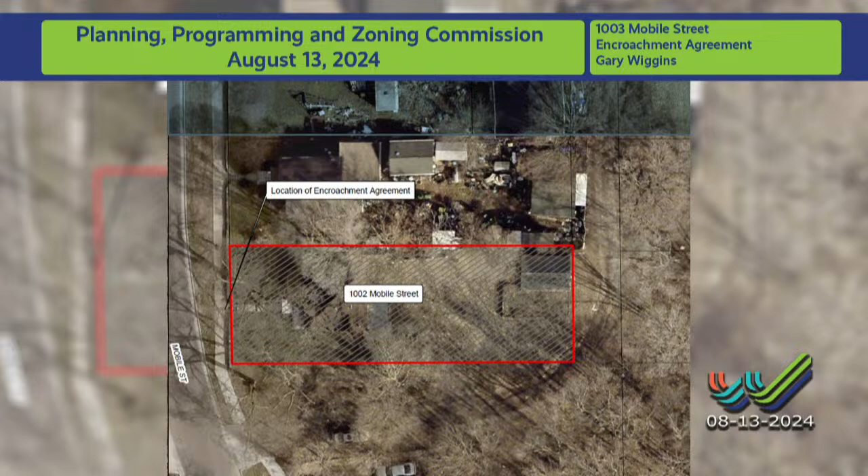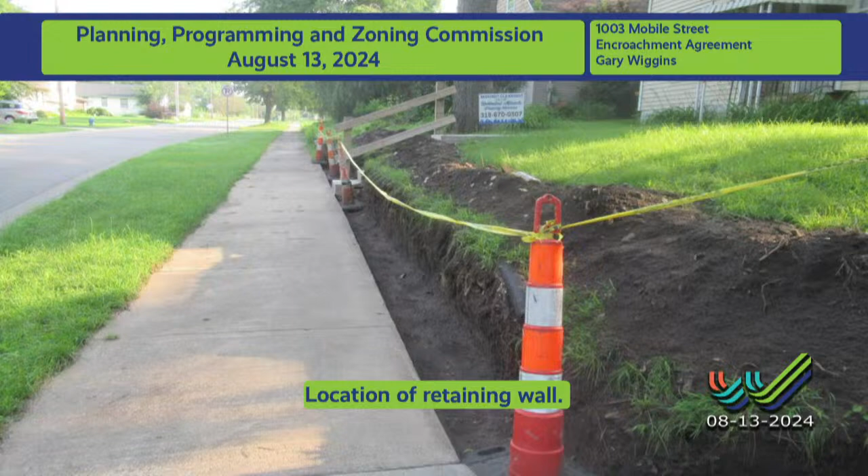Therefore, staff recommends that the request by Gary Wiggins for an encroachment agreement to allow for a retaining wall in city-owned right-of-way located in the R2 One and Two Family Residence District at 1002 Mobile Street be approved for the following reasons: the request will not appear to have a negative impact on the surrounding area or on vehicular or pedestrian traffic; the proposed structure will be replacing a previous retaining wall that there were no known issues with; and subject to the following condition, a fully signed and executed encroachment agreement.

Thank you for that. Are there any questions for staff? I have a question—who signs on the encroachment agreement? What's required on that? The property owner. Only the property owner? Yes. Okay, thank you.

Any other questions for staff? Is there anyone in the audience that would like to speak for or against the request? Anyone on Zoom that would like to speak for or against the request? At this point, I'll entertain a motion on the item.

Commissioner Shirk: I'd like to make a motion to approve the request by Gary Wiggins for an encroachment agreement to allow for a retaining wall in city-owned right-of-way located in the R2 One and Two Family Residence District, located at 1002 Mobile Street, subject to the following conditions: a fully signed and executed encroachment agreement.

Schaefer with the second. There is a motion and a second. Is there any discussion? Hearing none, all those in favor of the motion signify by saying aye.

Aye. Any opposed? Thank you. Motion carries. Next up, we have a request by Goodwill Industries for an encroachment agreement to allow for a stairway and a sitting area in the right-of-way of Maxwell Street, replacing a previous encroachment in the C2 commercial district located at 2800 Falls Avenue. This is Schneider with staff.

The applicant is requesting an encroachment agreement to install new stairs and a sitting area within the right-of-way of Maxwell Street. The request would not appear to have a negative impact on the surrounding neighborhood, nor a negative impact on vehicular or pedestrian traffic in the area. The site is zoned C2 Commercial District and has been zoned as such since the adoption of the zoning ordinance in 1969. To the north is single-family homes, zoned R2 Two Family Residence District, and to the east, west, and south are commercial businesses, zoned C2 Commercial District.

The applicant is requesting an encroachment agreement to replace a ramp and stairway with a canopy in the right-of-way along Maxwell Street with stairs and a sitting area. The ramp and stairway have been demolished. It was approximately 30 feet by 6 feet, and the new stairs and sitting area are proposed to be approximately 19 feet by 6 feet and will not be covered by a canopy.

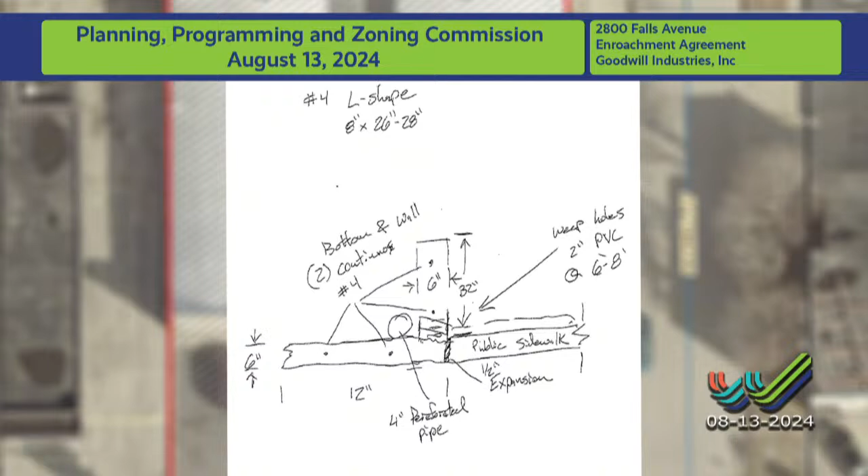An indemnity agreement was completed when the original stairs and ramp were installed in 1989. The indemnity agreement predated encroachment agreements, and the proposed encroachment agreement will supersede the indemnity agreement. The building department has no concerns about losing this entrance as an ADA access point because it is not a public entrance, and therefore it is not required to meet ADA accessibility.

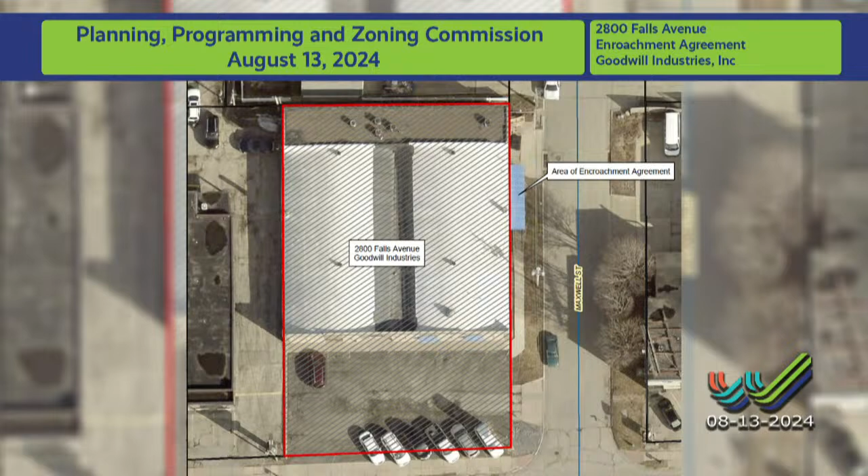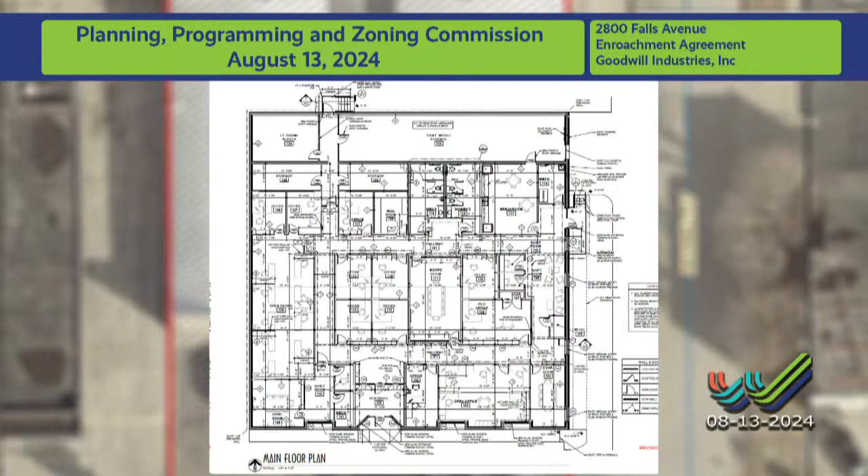Knudsen clarified he has no concerns with the request as long as the applicant is removing the existing private sidewalk along the easterly property line, per discussion at the Technical Review Committee meeting. Therefore, staff recommends that the request by Goodwill Industries, Inc for an encroachment agreement to allow for a stairway and a sitting area in the right-of-way of Maxwell Street, replacing a previous encroachment in the C2 Commercial District located at 2800 Falls Avenue, be approved for the following reasons: the request would not appear to have a negative impact on the surrounding area, nor on vehicular or pedestrian traffic. The proposed structure will be approximately 66 square feet less than the existing structure and will not encroach any closer to Maxwell Street, subject to the following condition: a fully signed and executed encroachment agreement.

Thank you. Are there any questions for staff? No questions for staff.

Would the applicant like to make any comments or answer any questions? Is the applicant here? Go ahead and state your name and address, please. Mike Toll, Levi Architecture, 3228 Cedar Heights Drive, Cedar Falls. Just here representing Goodwill, if you guys do have any questions.

I do have not necessarily questions, but some comments. I did want a sidewalk installed where it is needed. And I know you said in your documents that you took away the ramp and the canopy here, on page 19. I just want to remind Goodwill and those in the audience that we may not need a ramp if you're not disabled, but there was a reason why that ramp was there. So I just want to be mindful of the needs of some people with disabilities and why things were in place the way they were.

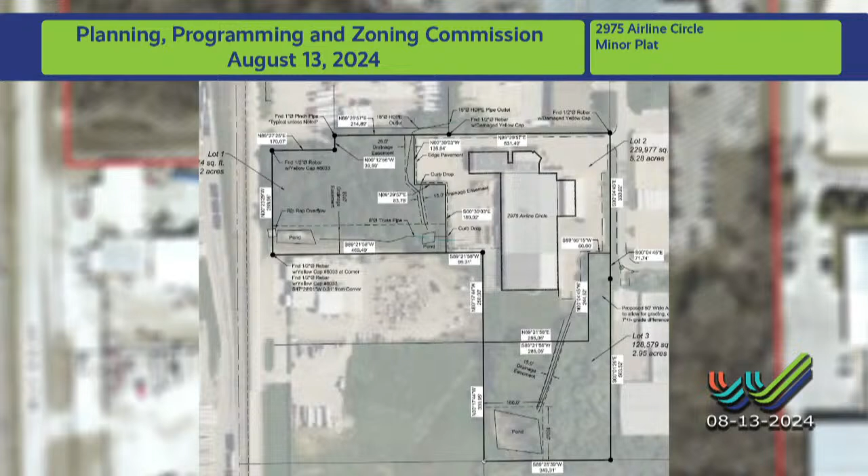The subdivision ordinance requires that plat submissions include criteria such as boundaries of property, proposed streets, easements and widths of right-of-way, utility locations, contours, as well as surrounding land uses. The plat does not contain all the details required. However, given the minor nature of the split, the additional information will not appear to be needed, as the plat is in accordance with the intent of the subdivision ordinance.

Easements within the lots will be added later, as some drainage details need to be worked out.

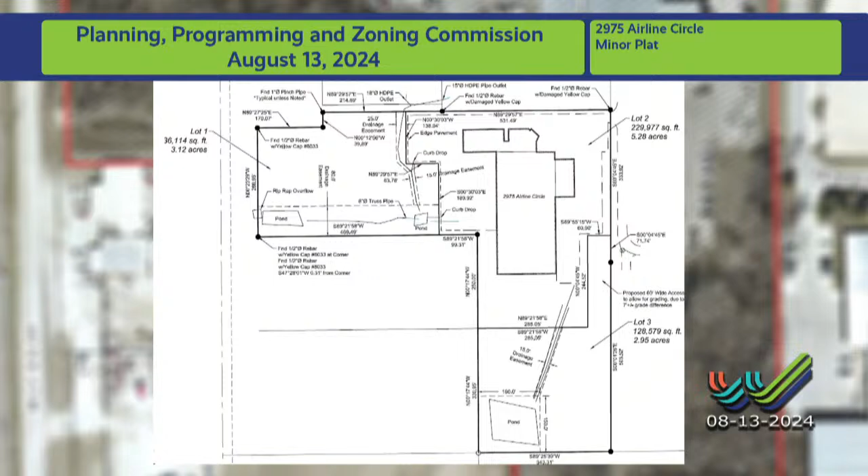Therefore, staff recommends that the request by the City of Waterloo for the minor plat of WCF&N Industrial Park, a 3-lot industrial plat in the M2 Heavy Industrial District located at 2975 Airline Circle, be approved for the following reasons: the plat is in accordance with the intent of the subdivision ordinance and can be served by existing utilities; the plat is in conformance with the comprehensive plan and future land use map for the area; and the plat will offer additional lots for industrial development in Waterloo.

Thank you. Are there any questions for staff? So this is déjà vu again. I'm just asking for clarification. So the items that were in question in the mailed out packet that was sent in the mail, those have been answered, and that's why we got the new updated plat, or the new updated materials. Correct. Okay.

Thank you. Any other questions for staff? Is the applicant here? Would they like to make any comments, or be available to answer questions?

This is Schrader with staff. The City of Waterloo is the applicant, so we are available to answer any questions you have.

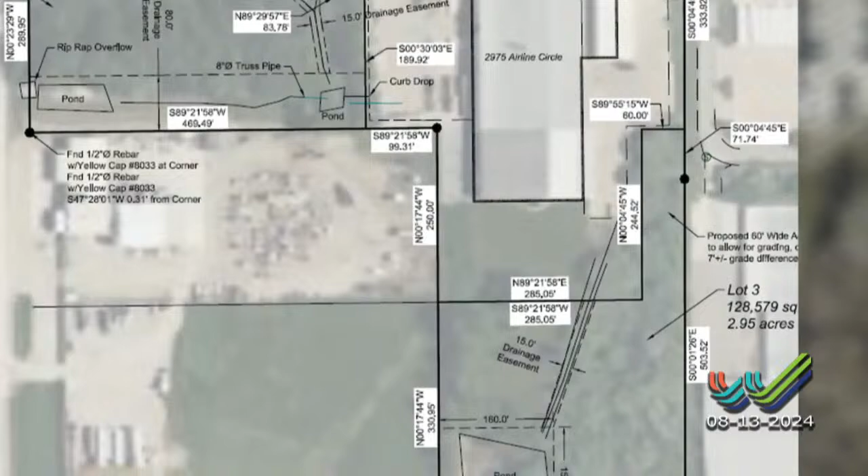Is there anyone in the audience that would like to speak for or against the request? Is there anybody on Zoom that would like to speak for or against the request? Hearing none of that, I'll entertain a motion on the item.

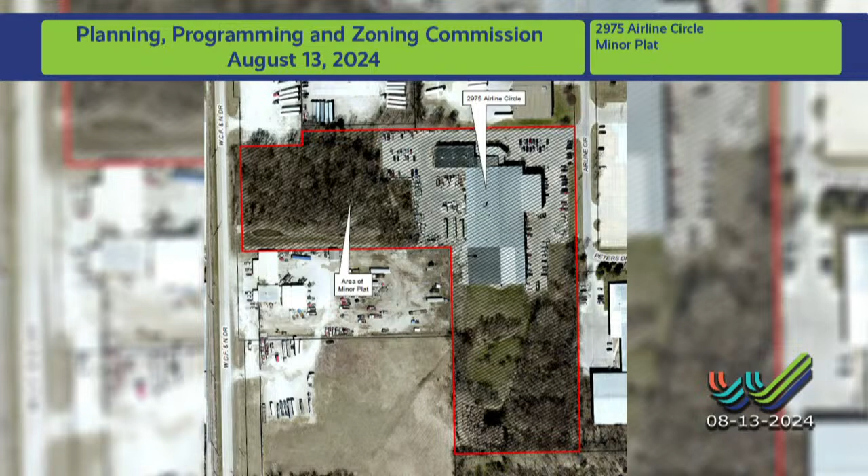I'll make a motion that the request by the City of Waterloo for the minor plat of WCF and N Industrial Park, a 3-lot industrial plat in the M2 Heavy Industrial District located at 2975 Airline Circle, be approved for the following reasons. The plat is in accordance with the intent of the subdivision ordinance and can be served by existing utilities. It's also in conformance with the comprehensive plan and future land use map of the area. The plat will offer additional lots for industrial development in Waterloo.

Surfling. There's a second, motion by Surfling, second by Schaefer. Any discussion? Do... or not. Do not? Do not, sorry. Yeah, you looked right at me. Said the wrong name. Any discussion? I do it all the time. Yeah, I'm still looking for that applicant.

Hearing none, all those in favor of the motion signify by saying aye. Aye. Any opposed? Thank you, motion carries.

Next up, we have a request by the City of Waterloo to vacate 8,708 square feet of East San Marnan Drive right-of-way in the S1 Shopping Center District located north of 2765 Crossroads Boulevard.

This is Andera with staff. The dimensions of that area are approximately 50 by 175, or about 2/10 of an acre. Vacating the right-of-way would not appear to negatively impact the surrounding areas and land uses, nor vehicular or pedestrian traffic conditions. Staff did review the amount of right-of-way, and it would not impact any future roadway improvements or other infrastructure-related projects, recreational trails, sidewalk infill, etc.

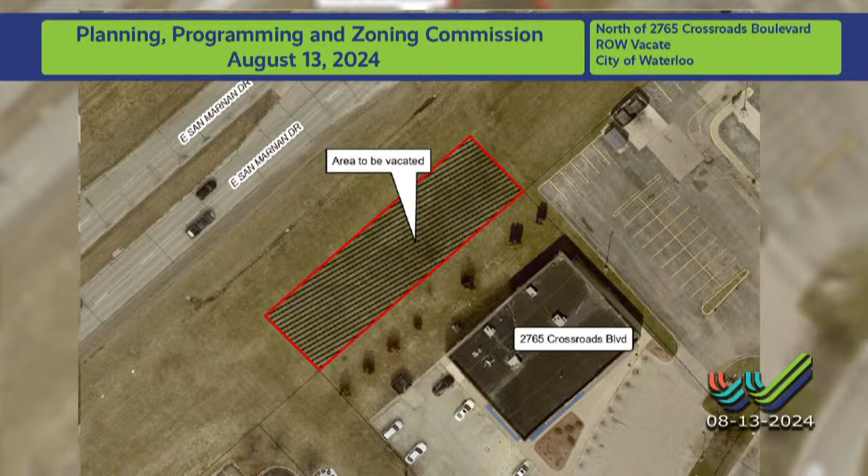This is Commissioner Schaefer with a recommendation to approve the request by the City of Waterloo to vacate approximately 50 by 175, 2/10 of an acre of East San Marnan Drive right-of-way located northwest of 2765 Crossroads Boulevard, for the following reasons: the request is in conformance with the comprehensive plan and future land use map; the request does not appear to have a negative impact on the surrounding area or traffic, and the right-of-way is not needed for future public use. This will be subject to the retention of a utility easement over, under, and upon the northwesterly 10 feet.

Second, Commissioner Surfling. Thank you. There is a motion and a second. Any discussion?

I do have one item to add. I want to thank the staff for stating that they went through the proper state code steps, and also to show that there was some form of sidewalk in the future, so we do continue to meet the complete streets goal. Any other discussion? Hearing none, all those in favor of the motion signify by saying aye. Aye. Any opposed? Motion carries.

Thank you. All right. Next up, we've got

A request by Bruce and Kaleen Hanson for an appeal of the driveway policy, to allow a second driveway and a driveway located off a dead-end road in the R2, 1 and 2 Family Residence District, located at 740 Skyview Road. This is also another one of those packets that got handed out.

So in addition to what we have in our main packet? Correct. Okay, not replacing, okay. This is Dornoff with staff.

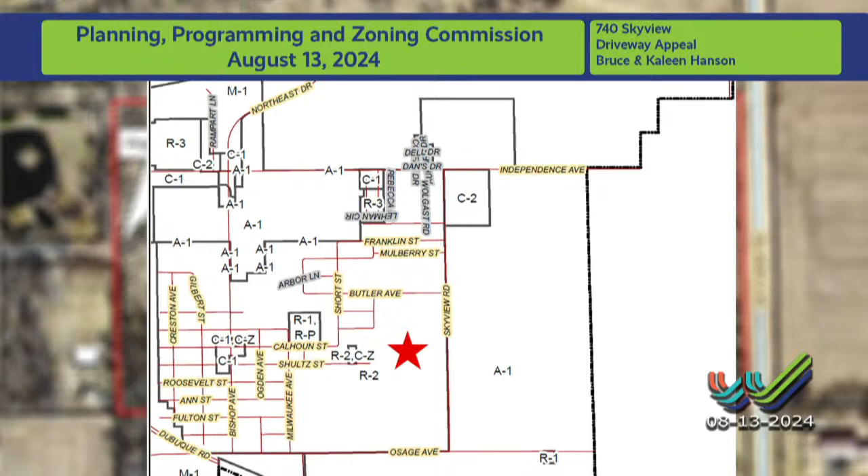The applicants can have a driveway off Shultz Street; however, they'd have to meet the code of ordinances requirements, and a cul-de-sac would need to be constructed. Currently, the applicants have not submitted a site plan for this request. There were no comments from the Technical Review Committee.

Therefore, staff recommends that the request by Bruce and Kaleen Hanson for the appeal of the city engineer, in order to allow a second driveway in the R2, 1 and 2 Family Residence District located at 740 Skyview Road, be denied for the following reasons: a second driveway on a double frontage lot would be in violation of the code of ordinances; a driveway off a dead-end road is not acceptable without a cul-de-sac or turnaround; approval of the request could set a negative precedent for other similar requests; and the applicants have not submitted a site plan detailing the location of the second entrance.

Thank you. Are there any questions for staff? Yes. We just got this packet at this meeting today. Is this the applicant's site plan for what they wanted for materials? Schrader with staff: No, that was something a neighboring property owner submitted, not the applicant. So this is not a site plan required for the petition? Yep, that's correct.

We will... you ready for this? Yeah, there's a lot of information in front of us.

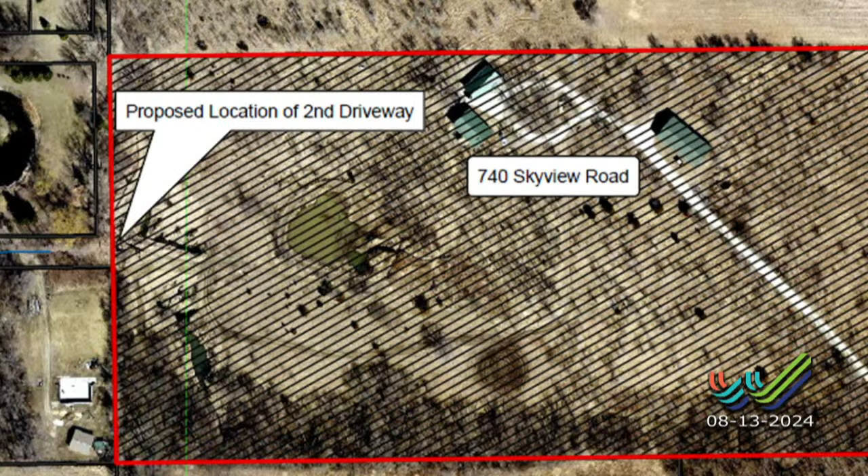We have a neighbor, apparently that's the packet you received, who doesn't want anybody going through there anymore. If you go to the second page, March 10th, there's a photo—he had put up trespassing signs, cones, and a large dirt pile on the city street, right on Shultz. We had code enforcement come out and he was instructed to remove that, which he did, and then we had our access back.

It's not a driveway we use all the time, but we have 20 acres, so it's not like I just have a little city lot where, oh, I need two accesses. It's a large parcel. There are other pictures, and their biggest complaint was that it would be setting a precedent in the area. It's already in the area—I have pictures of multiple dead ends where they have access going into their properties.

As of yesterday, about 2:30, I got the email that we needed to be here today. So I tried to find that they're bringing up the incident now that you can't have more than one access into your property. The last page is a whole list, just right up Shultz Street, of those who have multiple accesses to their property, and those are pretty much city lots. I don't know what a normal lot is, but it's not acreage like we have. The acreage directly north of us—I put the parcel number because there is not an address—has 6 accesses, which is identical to our property.

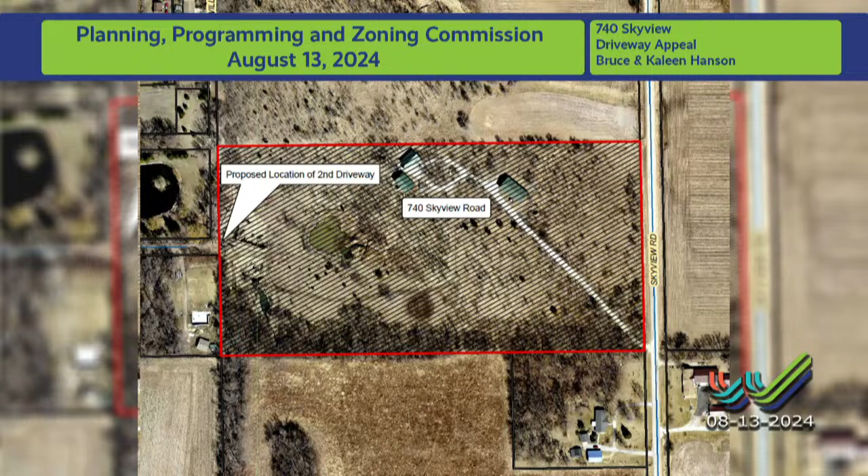There's a motion. Is there a second? I would like to second it. Thank you. There's a motion and a second. Is there any discussion?

Hearing none. All those in favor of... Quick question, would we recommend, is Jamie recommending that they provide a site plan later on, or is it?

Jamie is recommending denial because it doesn't meet code requirements and also doesn't have a site plan. It's my understanding it would still be recommending denial even if there was a site plan, but the planning commission is a recommending body only. So you haven't voted yet, but once you vote, that recommendation, if the applicants want it to, will still go on to the city council.

Got it. My second still stands. So in summary, if this does not pass, if the request is denied, there is another avenue where eventually they could work something out, but as of right now, it would be a no-go.

Hearing no further discussion, all of those in favor of denying the request signify by saying aye. Aye. Any opposed? Motion carries. Thank you.

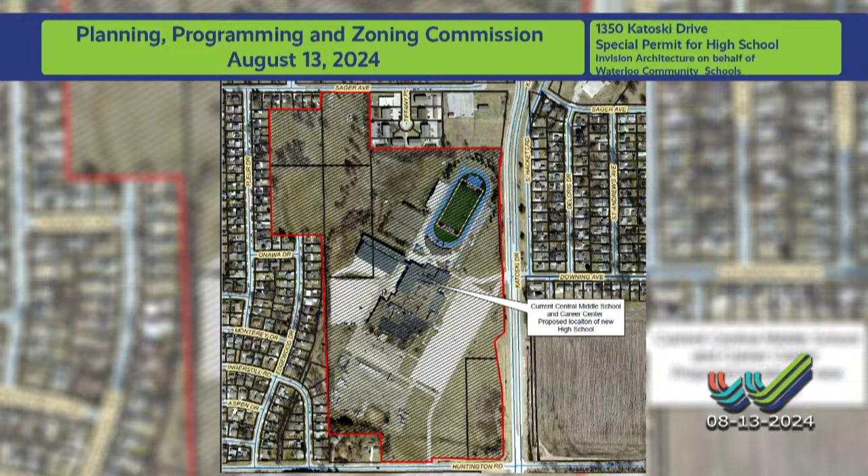The Complete Streets Advisory Committee also recommended that the trail along Katoski Drive be extended to Huntington Road and the trail along Huntington Road be extended to the school property line. The city engineer also recommends the trail be included, and the applicant has submitted a new site plan that includes the trail along both Katoski Drive and Huntington Road, along with a sidewalk along the new driveway to Sager Avenue. The school district also owns a 28.65 acre site on the east side of Katoski, but that property is not included in the special permit process.

It is anticipated to be used for the sports agri-science program and for additional sports activities in the future. Therefore, staff recommends the request by Invision Architecture on behalf of Waterloo Community Schools for a special permit for construction of a new high school located in the A1 Agricultural District, at the current location of Central Middle School and the Waterloo Career Center at 1350 Katoski Drive, be approved for the following reasons.

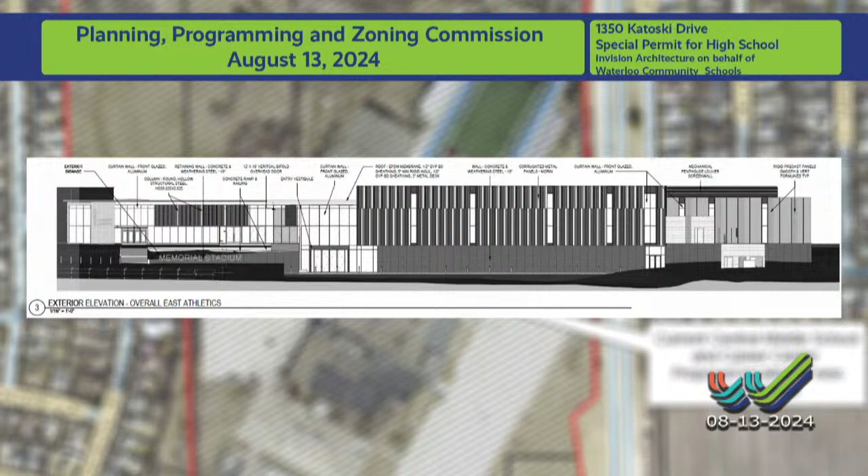The request would not appear to have a negative impact upon the surrounding area and would appear to be compatible with the surrounding area. The request is in conformance with the future comprehensive plan and future land use map, with the following conditions: that the final site plan meets all applicable city codes and regulations, including parking, landscaping, stormwater detention, etc., and that traffic improvements are properly implemented as recommended by the traffic study.

After further review by city staff, the City of Waterloo and Waterloo Community Schools will determine how to best fund these improvements. Thank you for that report.

That was definitely a lot of work.

As we go into this very complex and very important item, I'd like to remind folks that we're not necessarily debating whether or not a school is going to happen. We're debating or discussing whether this is the right location for this to be going on, more or less. With that, are there any questions for staff?

This is not a decision. With the former driving school course to be turned into a parking lot, where is driver's ed or driving school offered now for students? Not in Waterloo schools; it's a separate class you have to take. Okay, so it's outside of the school system. Yep. Okay, thank you.

I guess I have one simple question. There's no asbestos in that central building, right? I believe the architect is here; we could ask her if she would like to tell us.

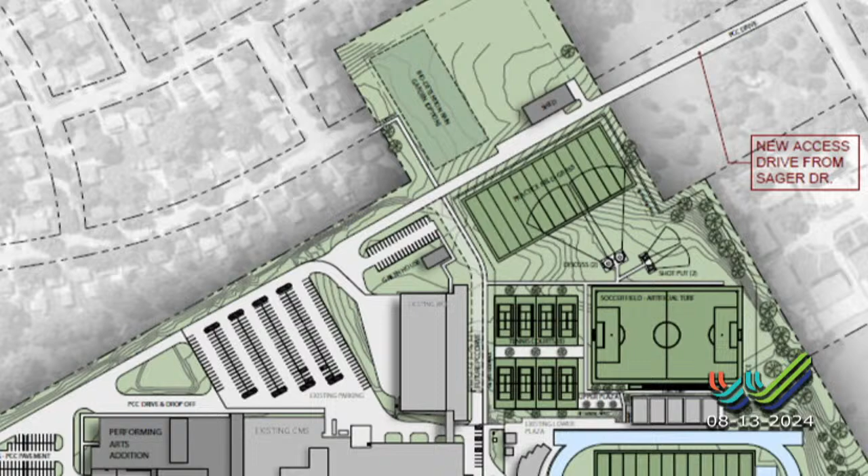This is Schrader with staff. That is something they are just showing preliminarily at this point. They have not submitted any detailed drainage plans. They will be required to submit detailed drainage plans, including drainage calculations, which will be reviewed by the City of Waterloo. The City of Waterloo Engineering Department reviews that and ensures compliance with code, so that would be a city review before they get to the construction stage. Okay, thank you.

Is there anybody else in the audience who would like to speak on the agenda item? Hi, my name is Carrie Lewis. I live at 1207 Edgewood Drive, which would be lot 28 on the proposed design plans. My husband and I had some concerns about this project that I believe you should hear before voting to rezone the property. The request to rezone lists a statement on the impact on the neighborhood and surrounding land uses. We do not agree that this request would not have a negative impact on the neighborhood, and we'd like to share some of our concerns with you this afternoon.

Currently there isn't a continuous fence or divider between the properties on Edgewood Drive and the parking lot on the west side of the school. We have many privacy and safety concerns. We do like having the tree line to block the view of the school, which also provides privacy for the homes on Edgewood Drive. Some of that tree line was removed recently, taking away some of that privacy, which is also diminished in winter when the trees lose their leaves.

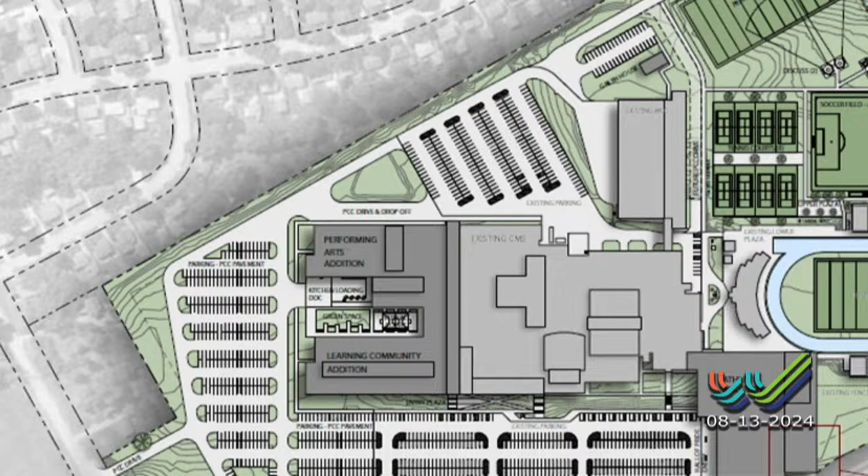Because, I mean, she's not wrong. Kids probably could try to go Back to the Future and reach 88 miles per hour over there.

We haven't talked about slowing down traffic on that drive on the west edge, but that's a really good point. We have installed speed bumps in various other places in the school district, so I think that probably makes a lot of sense, and I'll recommend that we do that.

The ones at West High are pretty effective if you don't want to rip out the bottom of your car. Yeah, the ones at West High are brutal.

If we could definitely make that western boundary a little bit safer and alleviate some concerns of those residents over there, I think it would be very much appreciated. That's the only question I got for you at the moment, so thank you.

Okay. Is there anyone else in the audience?

Yes, my name is James Lewis. I also live at 1207 Edgewood Drive.

No offense to the speed bump comment, but I grew up in Southern California at a big school. We had a strip just like that to get out of our parking lots, and we had other accesses to get in and out. I lost 4 friends because everybody, including myself, didn't care about the speed bumps. We had to get out to get to Del Taco or Taco Bell or McDonald's for lunch, or out after the end of the day. I lost 4 friends that hit the speed bump, lost control, and killed themselves. No matter how many speed bumps, kids are stupid, no offense. They don't think anything's going to happen to them.

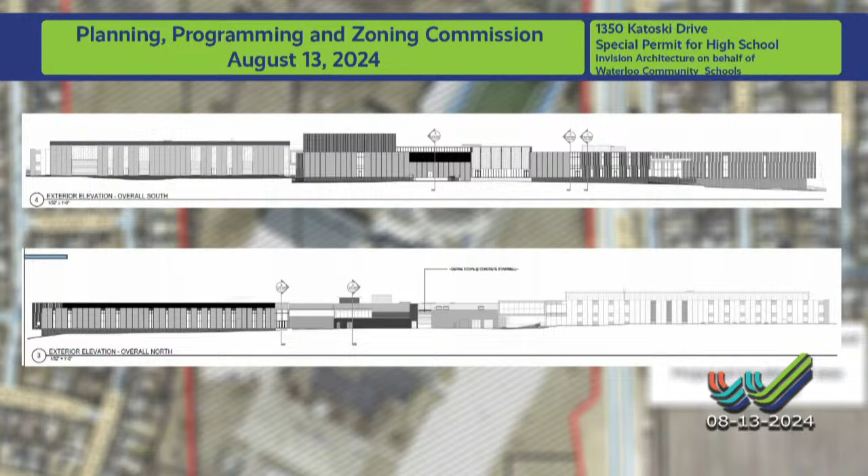Excellent, thank you. Are there any other questions? I think we can entertain a motion now, right? Yeah, okay. Just a note that I will have to abstain from this vote. I planned on a roll call vote anyway. Thank you. All right, we can entertain a motion then.

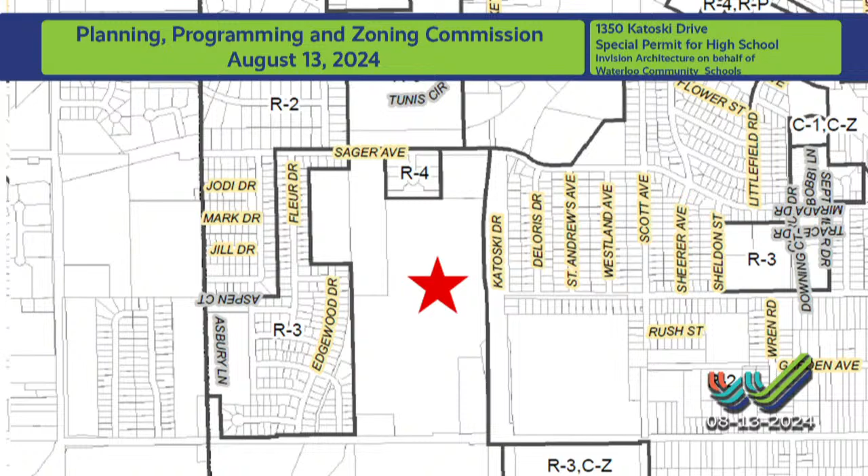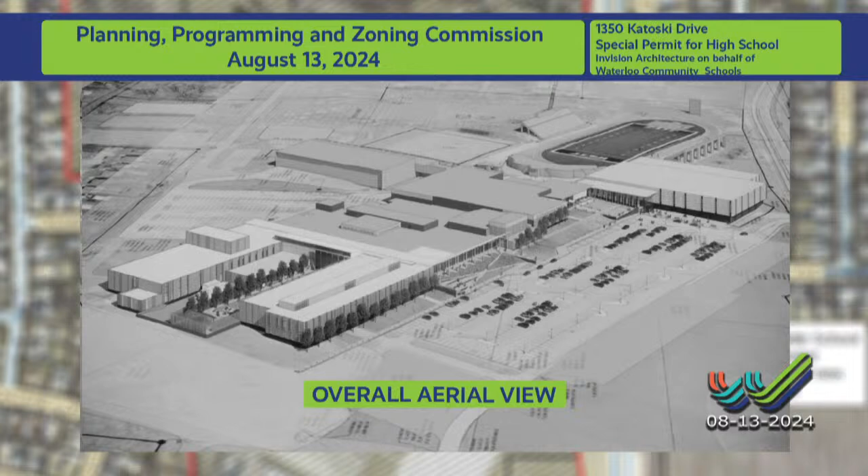Commissioner Schaefer: I make a motion to recommend the request to approve Invision Architecture on behalf of Waterloo Community Schools for a special permit for construction of a new high school located in the A1 Agricultural District, at the current location of Central Middle School and the Waterloo Career Center at 1350 Katoski Drive, be approved for the following reasons: the request would not appear to have a negative impact upon the surrounding area and would appear to be compatible with the surrounding area. The request is in conformance with the comprehensive plan and future land use map, subject to conditions: that the final site plan meet all applicable city codes and regulations, including but not limited to parking, landscaping, screening, and stormwater detention. Traffic improvements are properly implemented as recommended by the traffic study after further review by city staff, and the City of Waterloo and Waterloo Community Schools look at how best to fund these improvements.

Second, Shirk. Thank you. Any discussion? Thank you for keeping a level head, and hopefully we got some good input, and regardless of the outcome of the vote, good things happen out of this.

Starting with Commissioner Ewing, abstention? Abstention. Commissioner Shirk? Aye. Commissioner Dunat? Aye. Commissioner Surfling? Aye. Commissioner Schaefer? Aye. Commissioner Lystico? Aye. Any opposed? There's no opposed. We did a roll call, so that motion carries. Thank you.

We've got one final item on the agenda here. Just one thing of note, that is a recommendation that goes before the Board of Adjustment. That will be on August 27th at 4 PM, in this same room. Thank you.